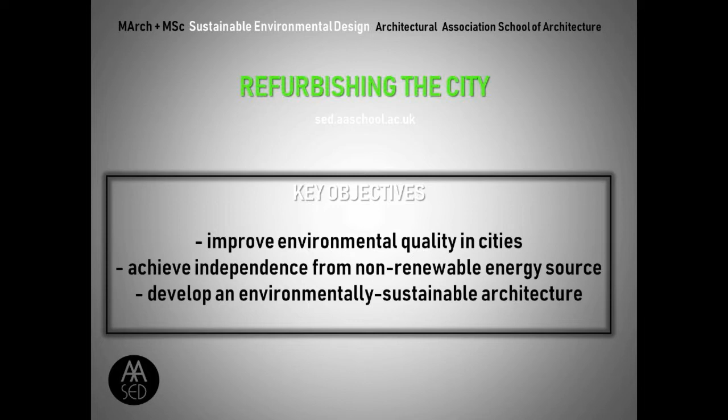Our key objectives are to improve environmental quality in cities, to achieve independence from non-renewable energy sources, and to develop an environmentally sustainable architecture which can adapt to climate change.

At the core of our approach is research, and we learn how to do research by being able to focus on important questions, like, for example, what makes a good environment indoors? Or what makes a good environment outdoors?

Supporting our research aims is our taught program, which consists of a number of taught lectures that deal with concepts, the principles for design, a number of software workshops that give us the tools for analyzing and undertaking design research, and projects which deal with practice.

As I mentioned earlier, our reach is global. Over the last 20 years, our students have developed some 750 projects around 150 cities in 60 different countries and very different climates.

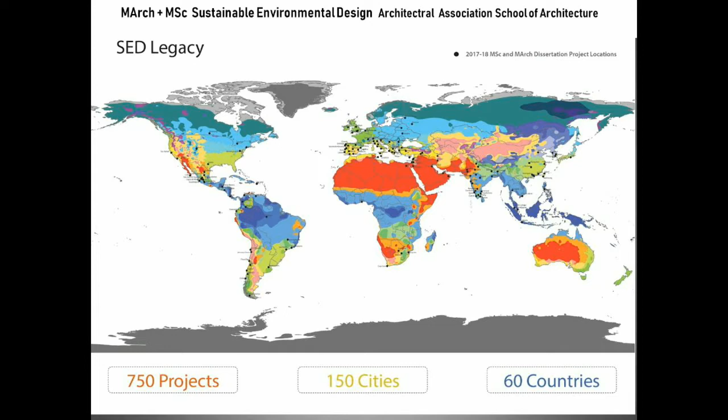We measure environmental conditions, and we use the measurements to calibrate software that allows us to model and simulate conditions, thereby extending our capabilities. So rather than having to measure for a whole year, we can simulate a whole year in just a few seconds.

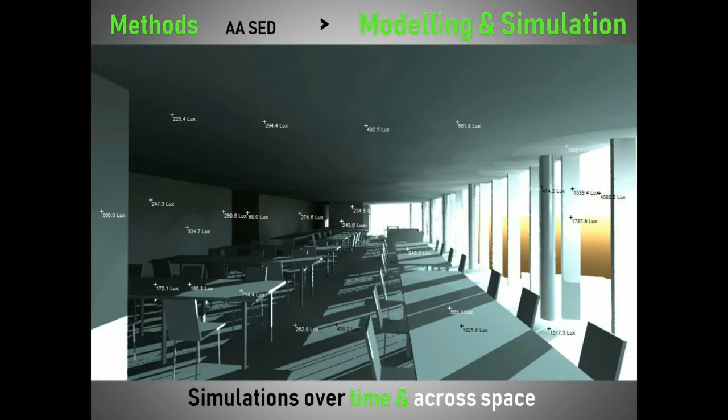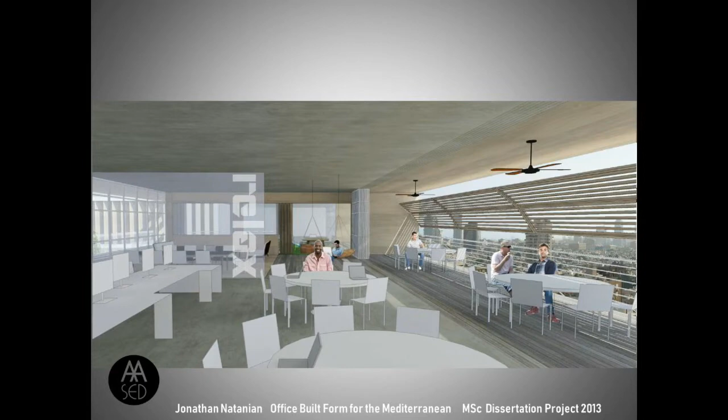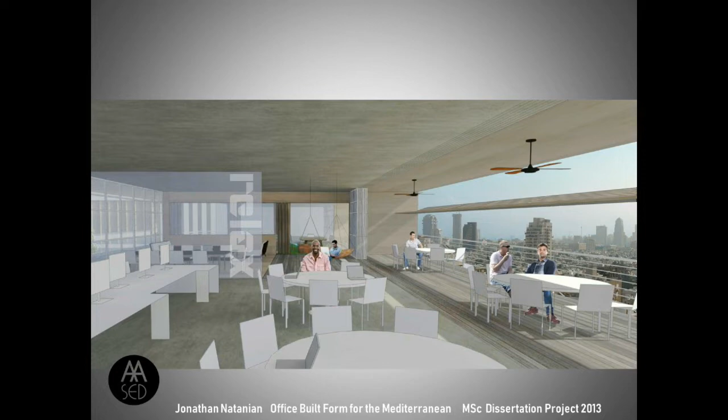And that allows us to predict what might happen in a virtual building, over time, and across all seasons and space, and its different rooms and spaces. And from simulation, we can engage in design research and back to simulation, if that is needed, as we develop the project.

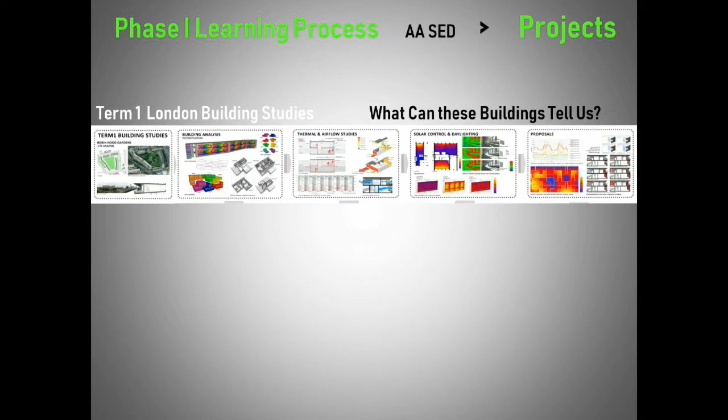London is our laboratory for half of the year in our first two terms. And we start the first term of the year by taking on the study with some selected London buildings. What do these buildings tell us? And in the second term, the insights and findings from the studies are input as starting questions for design research and design projects. What can we tell back?

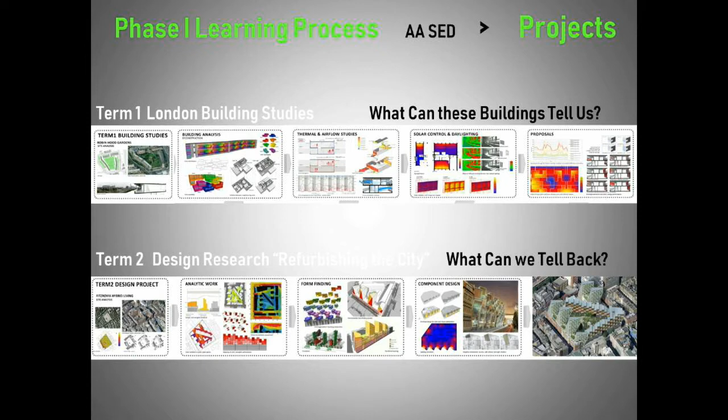The dissertation project is the main piece of work done individually by our students. That allows an individual agenda to be developed that provides choice of contexts, climate, building type, research agendas, and so forth.

There are some favorite topics that our students like to engage with, one of which is the urban morphology, the way in which the urban block shapes itself. The issues that entails, the possibilities that we can have in improving its ecology and environmental performance, that's the strategic level.

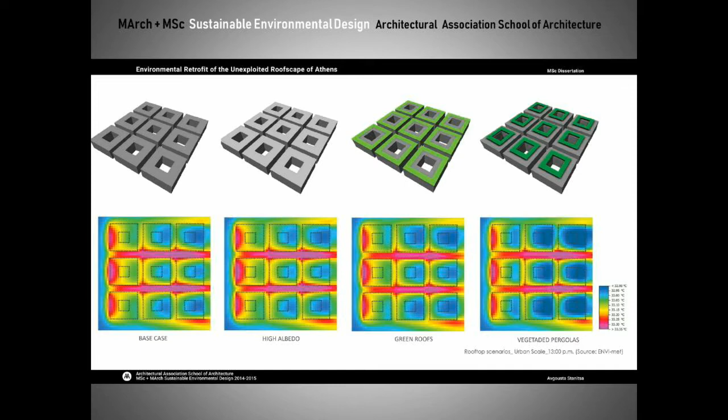But also at the most specific level of a design project that looks at the innovative ideas of the expression of the urban block in different climates.

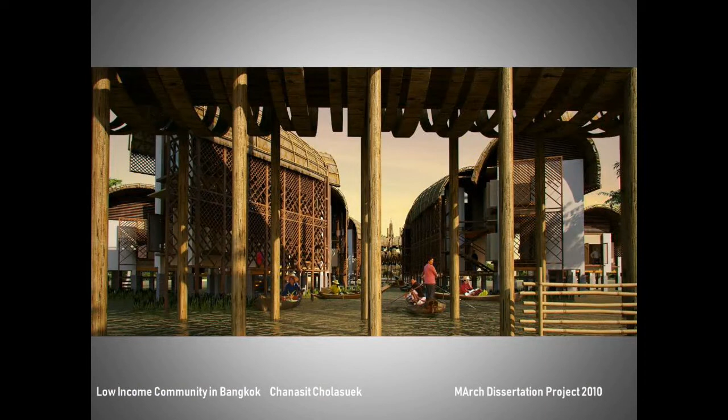We are looking for a new architecture for the tropics. Architecture is to some extent inspired from the tradition of the climate in these areas and expresses the principles in innovative ways. The perforation of the facade of the building in order to allow air permeability, and the use of local materials, the good level of shading and solar protection, and so on. But also the transitional spaces and the adaptable spaces in between, etc.

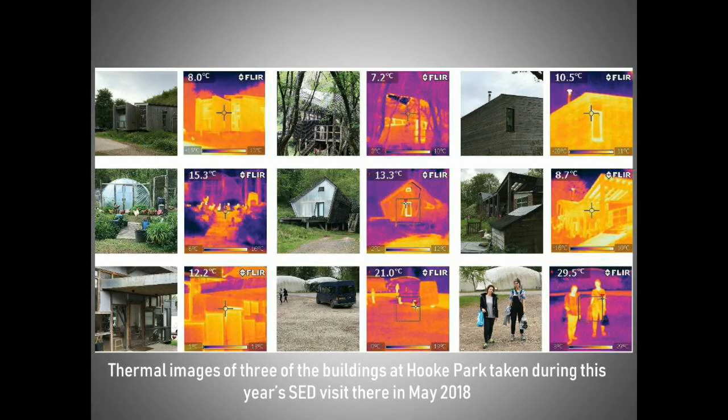But we also went to Hooke Park to do some experiences, such as these that you are seeing now on the screen. These are some thermal images taken by our students on the various buildings which are constructed around Hooke Park, which is another facility of the AA in Dorset.

Our students also have every year a trip abroad, and this is an example from last year. We went to Bologna, where we collaborated with

SOS and Mario Cucinella's team. Our students went there to present our work and exchange ideas, and the students there in Italy also presented their work.

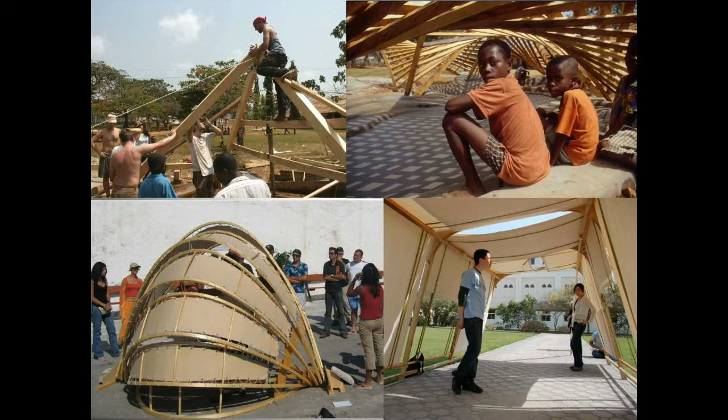We also encourage our students to build small structures. These are just a few examples.

The top two images are from structures built in Ghana, the bottom left is a structure built in Greece, and the bottom right is a tent built in Sharjah.

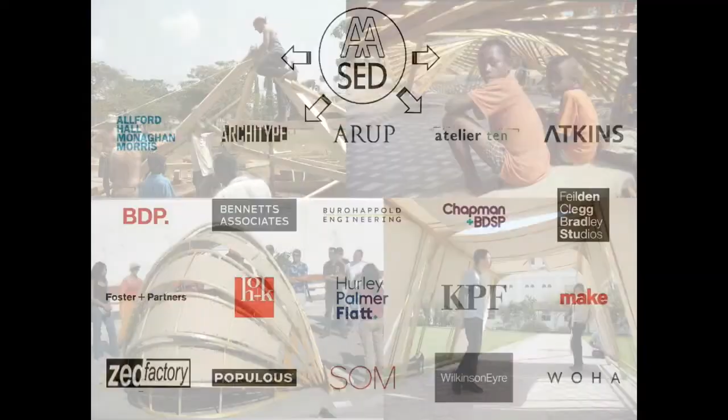We explore the relationship between practice and research and have collaborations with leading architectural practices and environmental engineering consultancies in London. Each year, several architects, engineers, and researchers are invited to present projects that illustrate their practice and experience with sustainable environmental design.

But we also like to promote our work wherever we can. This is the end of year projects review at the AA two years ago.

Here you see an exhibition of 12 projects by 12 of our Indian students, which we brought back to India on the occasion of the International PLEA Conference in Ahmedabad in December 2014.

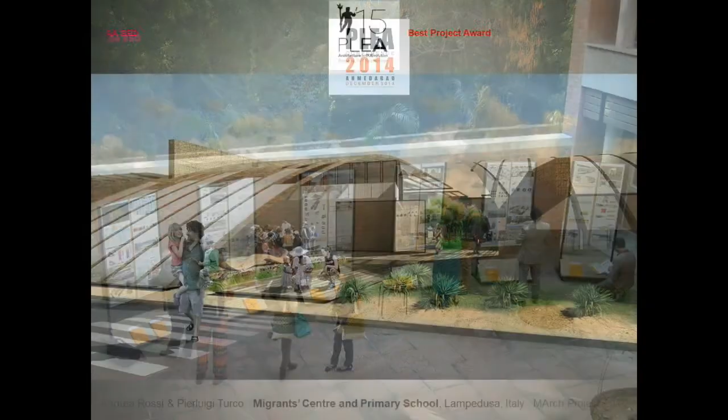We tend to present 10 to 20 papers per year in journals and conferences, and also like to win awards. These are some examples.

But we also have fun in the studio and party sometimes.

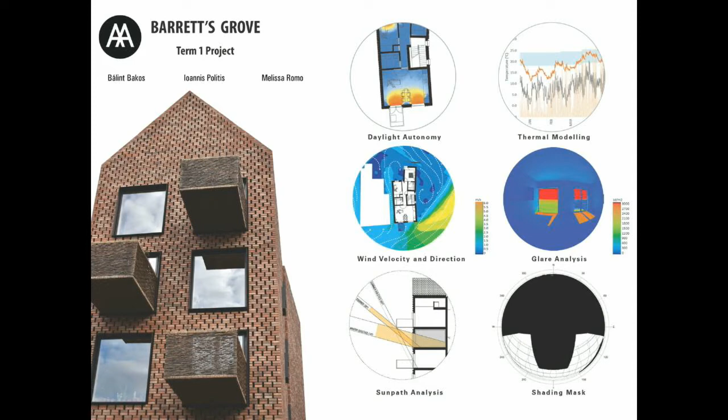Now I'm going to turn to my colleagues here. Here is Melissa Romo and Bálint Bakos. Melissa is an MArch student and Balint is an MSc student. Balint just finished, and Melissa is doing the 16-month MArch.

So I wanted to ask you a first question. I know you collaborated together with another colleague in the first two terms. You did the case studies in term 1 and the building study in term 2 in the same team. Can you let us know about your experience and how you enjoyed the program?

Yes, hello everyone. So I'm going to talk about the term 1 project, and Melissa can continue with the term 2 project.

So we form teams at the beginning of the term, and then we choose buildings already built as case studies. Afterwards, what happens is that we visit these buildings, we talk to the architects, we try to collect every possible published information from the internet, as well as do measurements inside the buildings related to thermal comfort and daylight.

We place monitoring instruments, so we do very precise measurements of the building. Afterwards, we use these measurements to construct a model of the building in a software environment, which we can use to test a variety of different things and how they influence the environmental performance of this building.

Shall I show you some slides of your dissertation? Certainly, yeah. So that's where the motivation is coming from. As an architect, I think if you're looking to do something impactful, you might as well search in the developing world, as there is a lot to do.

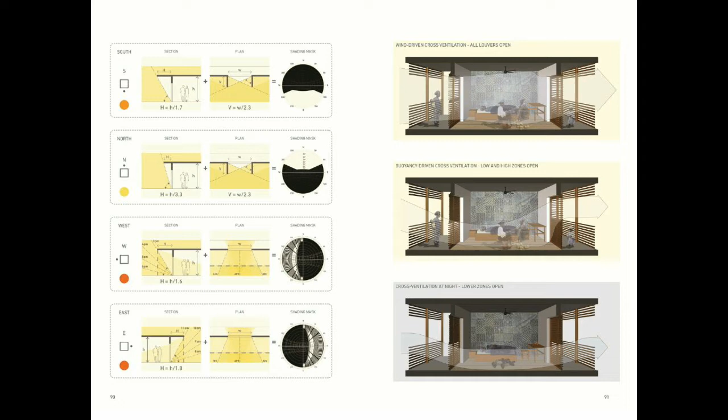And yes, it was a very interesting project. I went to Lagos for 2 weeks and did field work there. I was visiting the low-income settlements in the city and engaged in learning about their traditions, space use, and climate. So it's very interesting, and just finished recently.

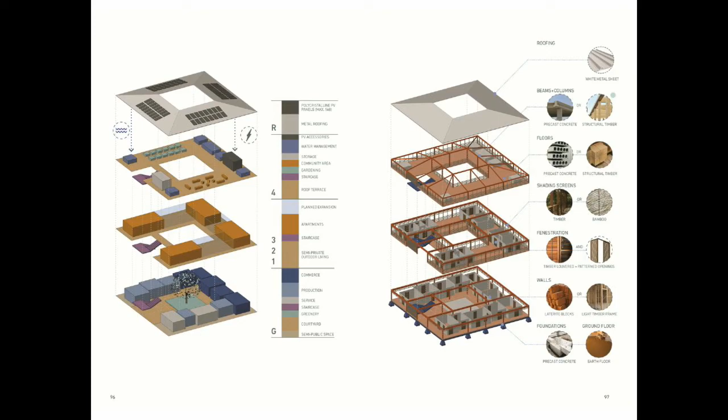Okay, now I'm going to ask Melissa. You're still doing your dissertation because you're in the 16 months program, and I know you're designing for Mexico. You're Mexican, and how are you experiencing this whole process? In your case, because you're now in the design phase, how do you think that the first two terms have contributed to where you are at the moment?

Well, it has been quite challenging because, first of all, in the first two terms, we were focused only on studying the weather in London, the climate of London. So when I go back to the climate of my hometown, even if it's a climate and a place where I have been raised and spending the last years of my life there, it's quite interesting to start studying it from another point of view, a more scientific point of view, where you understand the main strategies and the main problems in your climate.

So I think it was very important from terms 1 and 2 that we take all these conclusions, that we learn how to use the tools and the software and everything. And after, I think that during the dissertation, the most important part is to end up with some kind of design guidelines that could help me apply all this knowledge back at home. And also the main focus of my dissertation is residential buildings.

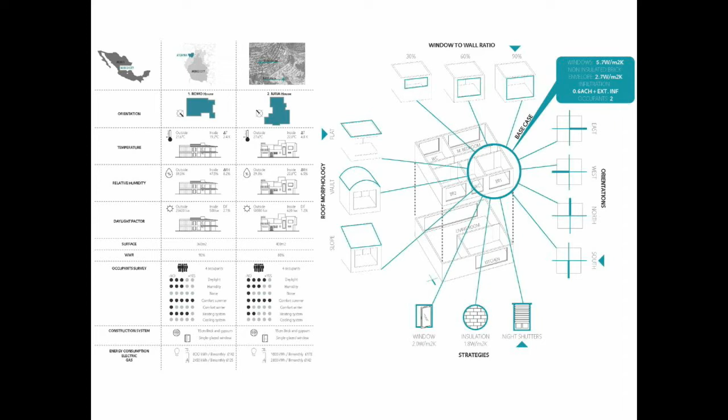So I know, Melissa, that you want to go back to Mexico and carry on your work there. But unlike Melissa, Balint, you just submitted your dissertation, your MSc, and I know you want to stay in London and you are at the moment looking for a job. So how do you think or feel that the SED program has helped you or is helping you and influencing you in your job hunt?

Yes, I'm planning to stay in London for a few years to gain some internationally relevant experience. The program has been helping me in a way that I took a year off to think about important or meaningful things for the profession. And for example, now I'm also considering the option of working for a consultancy, which I never did before—so not only architecture jobs.

And during the course, we met quite a few people who either own their businesses or work for these kinds of firms. So it's a good networking opportunity for the students to build some relationships so that you can show people how you work, how you're thinking. So afterwards, as you're already in London, it's likely that if they need someone, they will get back to you.